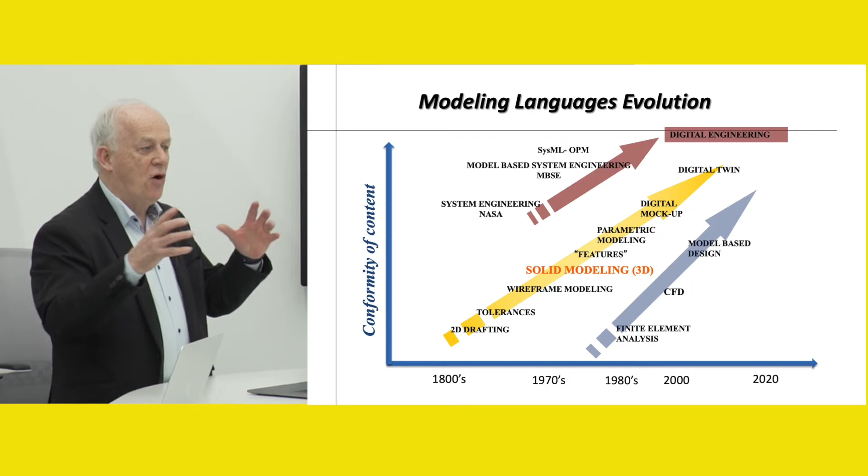And today, we're talking about digital twins, meaning can we have a digital reality that's very similar to the physical reality of an airplane, of a satellite, of a car, of many things that we have today. And this whole, all these three streams join to create now what we hope in the next coming years, what's called digital engineering.

Like I said earlier, system engineering, which is at the base of system thinking, is about dealing with complexity. What we know today in the world, and I'm sure you see it, is that complexity has increased so much that we need to find ways to treat it.

The Apollo program in the 1960s looked at this and started system engineering. Now, if you look at system thinking and digital engineering from another point of view, it has design, development, production, and service, and initially it was called computer-aided design, computer-aided engineering, and computer-aided manufacturing. But then at the system level, we moved to the virtual mock-up, the virtual prototype, and the virtual production. So it is at all levels.

And now we have at the system physical, cyber-physical system level, where we talk about digital twins, virtual reality. This is the level of digital engineering, and system thinking is all about this, looking at the overall view. There's still a lot to be developed there.

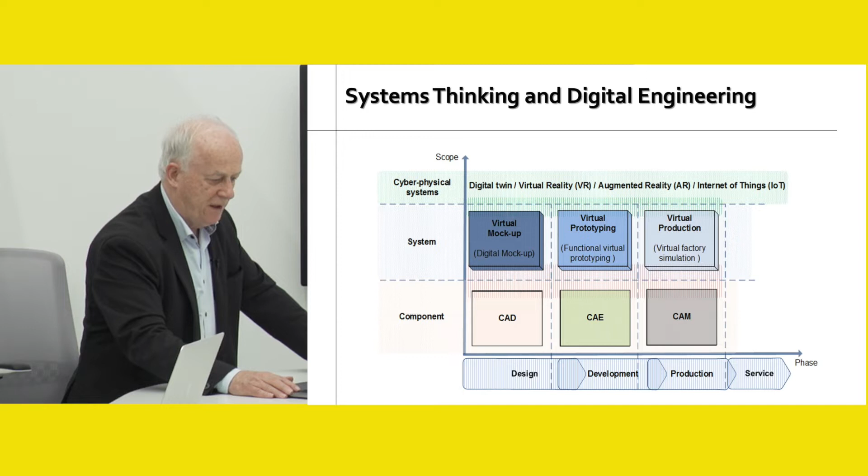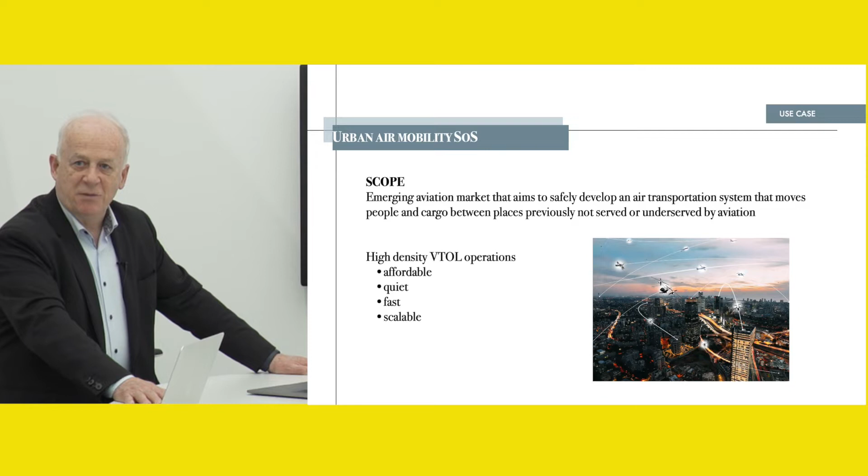I will now give the floor to Carolina, who will talk to you about a particular case, which is called urban air mobility, system of systems. As Clément was mentioning before, our group...

Basically focuses on understanding what we can do in order to reduce the complexity and the uncertainty of several systems. What we have here on the screen is a use case that we are currently working on. It's called urban air mobility. This is considered a system of systems.

The scope of urban air mobility is to bring what we currently have in terms of aviation and develop it and improve it to develop air transportation systems that will move people and cargo between places that were previously not served or underserved by aviation.

So what is required to have urban air mobility systems? We need them to be affordable. They need to be quiet, so very low noise. They need to be fast, and one of the most important things, they need to be scalable.

I'm looking personally into understanding what is the effect of technology insertion in system of systems. What you have here in the picture is basically a representation of what NASA believes should be the next step into urban air mobility. They had a call for proposals called the NASA Grand Challenge.

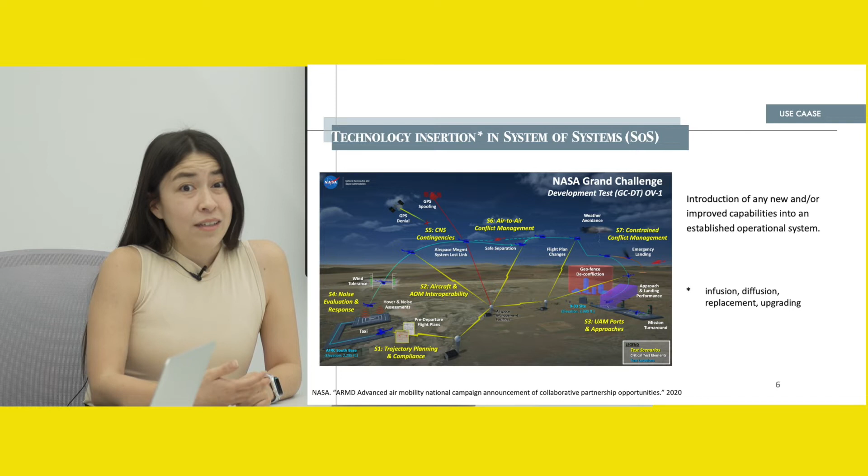Here at Skoltech, we have several courses that help students focus on these kinds of projects, and one of them is the systems engineering course. The last version of it was held last year, and the students actually focused on understanding what they can do in order to improve urban air mobility systems. So now I will give the word to Andrei, who will talk to us a bit more.

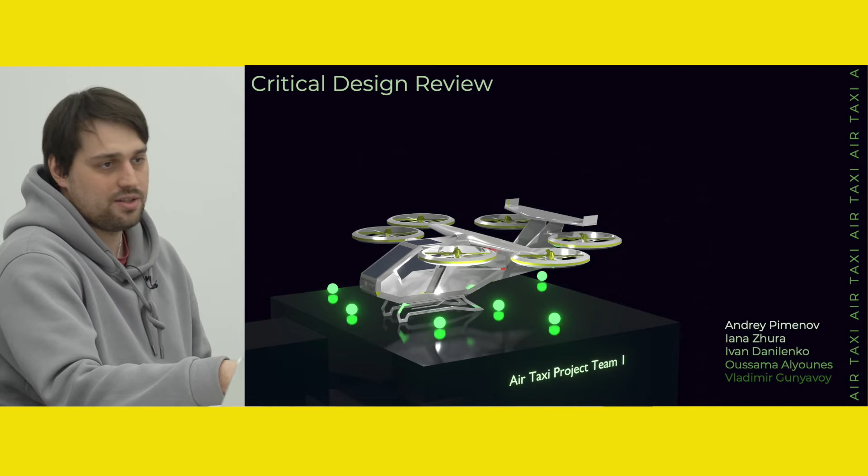Hello everyone, I'm Andrey Pimenov. I'm a fourth-year PhD student here in Skoltech, and let me show the project, which is Air Taxi, which we made in the systems engineering course in December last year. So each engineering project starts from the mission, and our project starts from the mission too.

So the mission of our project was to transport 6 passengers from Skolkovo to Vnukovo airport and vice versa with Air Taxi. We moved to developing a success criteria for this mission. System engineering starts from estimating the success criteria of the requirements of the project.

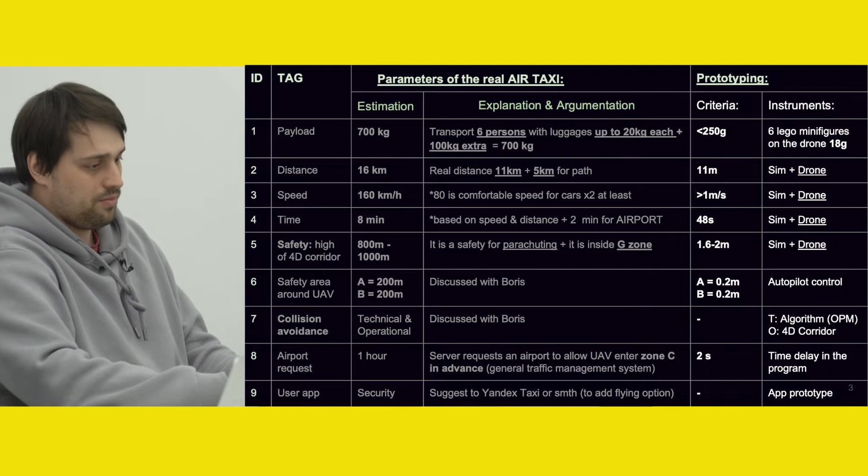On this part of the slide you can see these requirements. I'll skip a lot, but the idea is that once we formulate the requirements, we move to the architecture. This is the system architecture of the real Air Taxi. It consists of the Air Taxi itself and the system around it, for example the airport, the server, and the passengers. Passengers are also part of the system, but part of the bigger system, not the Air Taxi itself.

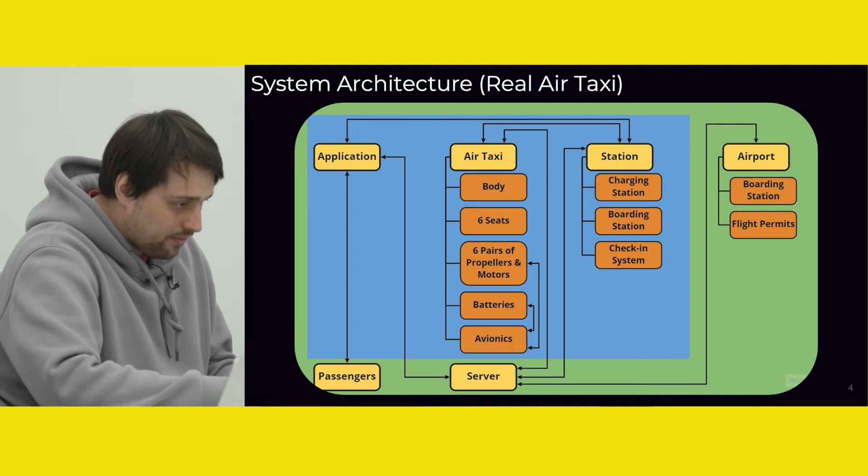Then we move to the system architecture of the prototype of the system. In our case it was very simple: it was a drone from the Geoscan company, and we programmed that drone to avoid obstacles during the flight.

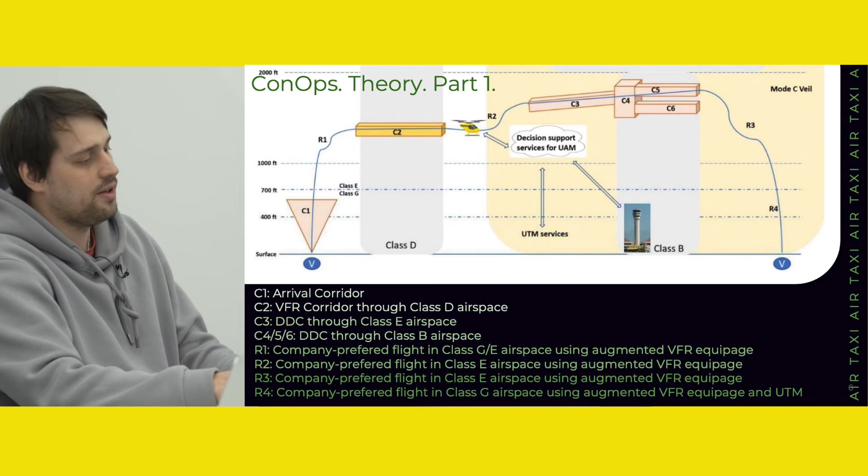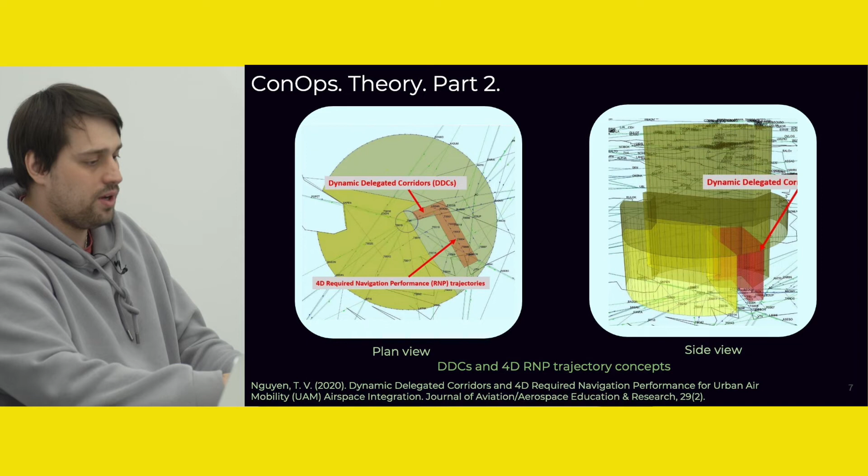This is a concept of operation from a paper we read, a very important paper, based on NASA work. This shows how 4D corridors look in a real application. Around the airport we have different zones, and just to go inside the airport - in our case this Air Taxi moving inside Vnukovo airport - we have to enter this 4D corridor.

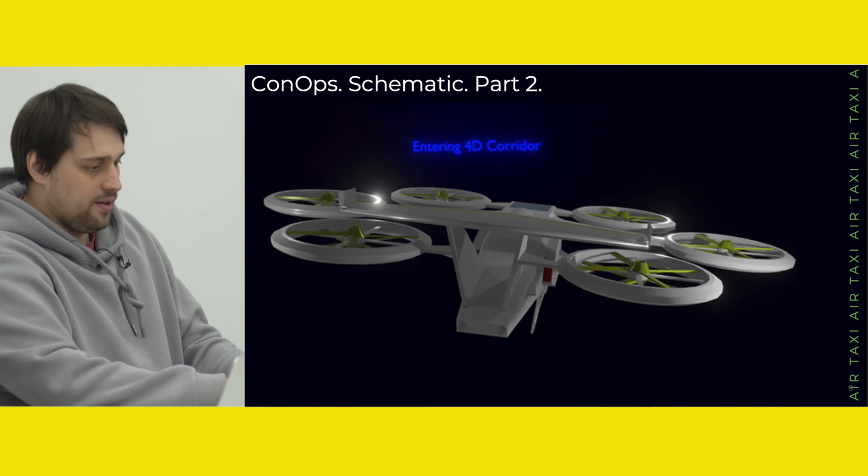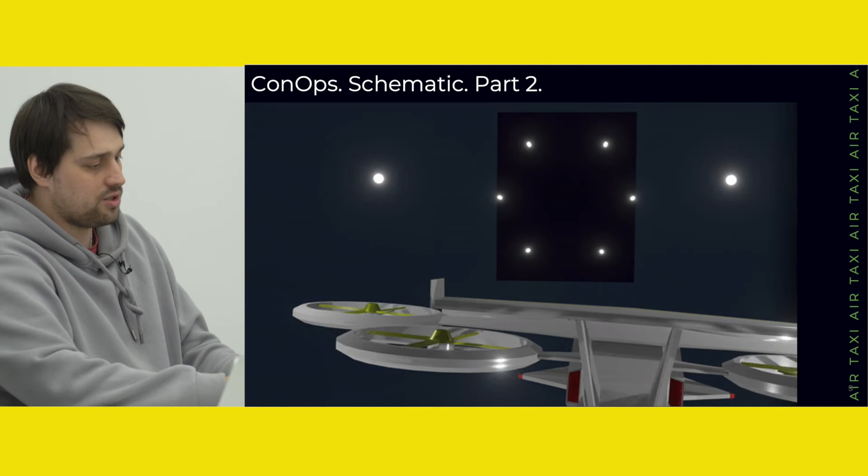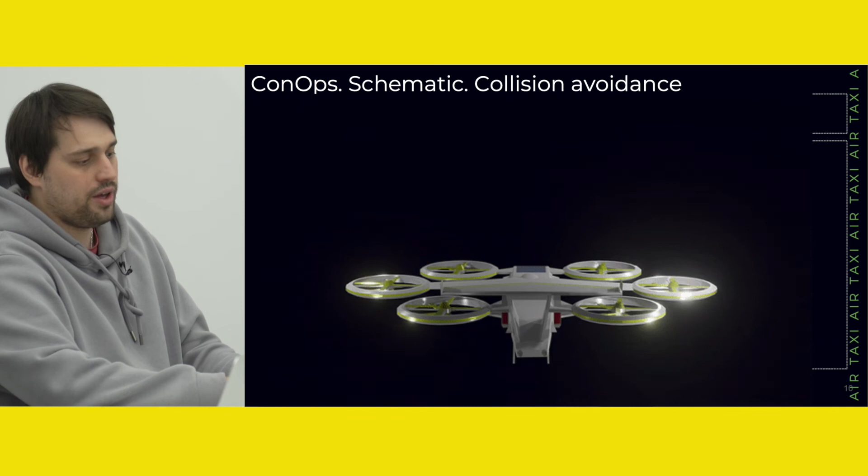On this slide you can see a visualization of this. We have the Air Taxi, and it's sending data about the 4D corridor to the airport and vice versa. On this slide you can see the avoidance - around each Air Taxi we have a special zone, a special safety zone.

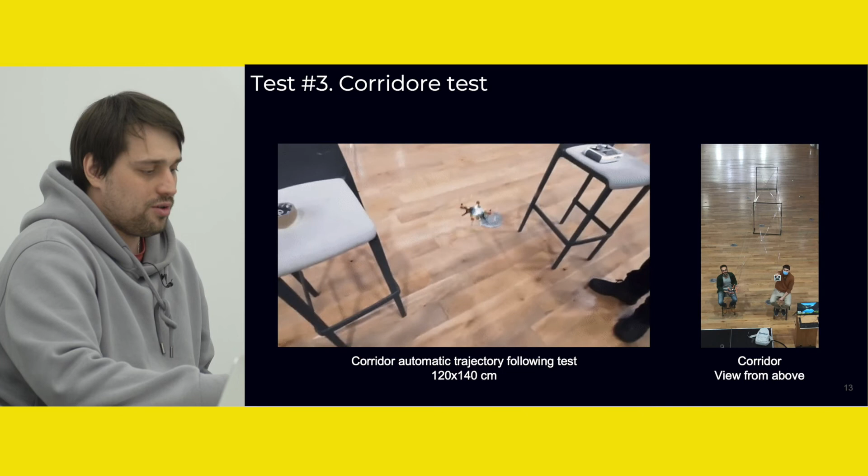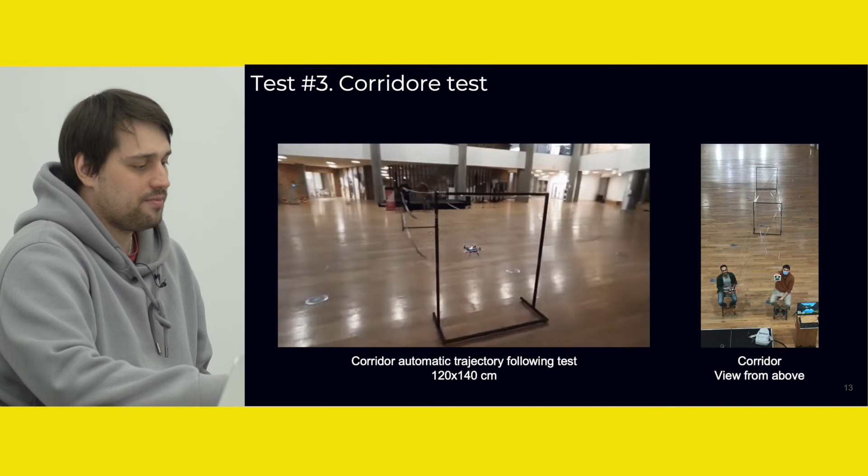Hello guys, my name is Jana Brovar. I'm also a PhD student at Digital Engineering Center and a member of the System Thinking Group. I will present another use case that we are investigating with our research group.

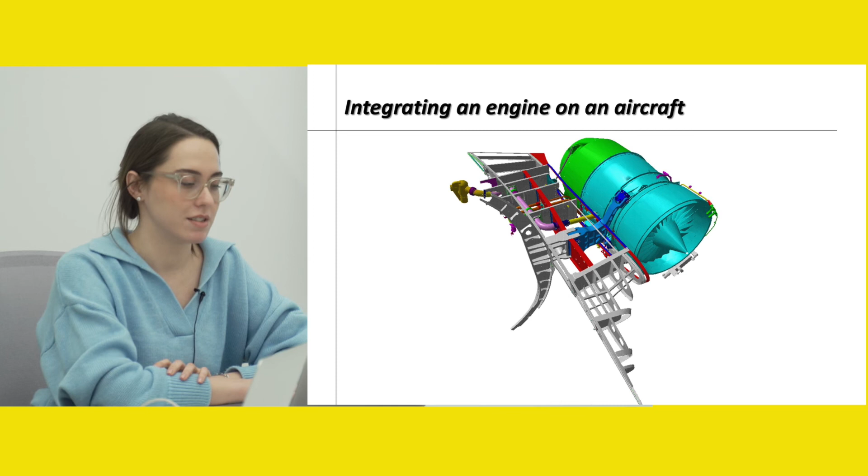It is an engine aircraft pylon. It is a critical system for the research as it supports and provides the function of the engine, supporting thrust, providing electric power, connecting the engine to the airframe, and supporting cooling and heating of the passenger compartment. Thus we should pay attention to that system as a critical point in aircraft design.

One of the tools that could be used for system components analysis is the design structure matrix, presented here. The design structure matrix is a tool that supports network modeling, providing the analysis of system components and their relationships.

DSM could help us not only analyze the system architecture, but also provide analysis of system behavior, as we can analyze the interaction between each of the components. By interaction I mean the different flows, for example flow of material or some fluids, flow of electricity, and this interaction is exactly what brings the system its value. That's why this tool helps us have a deep analysis of the pylon architecture.

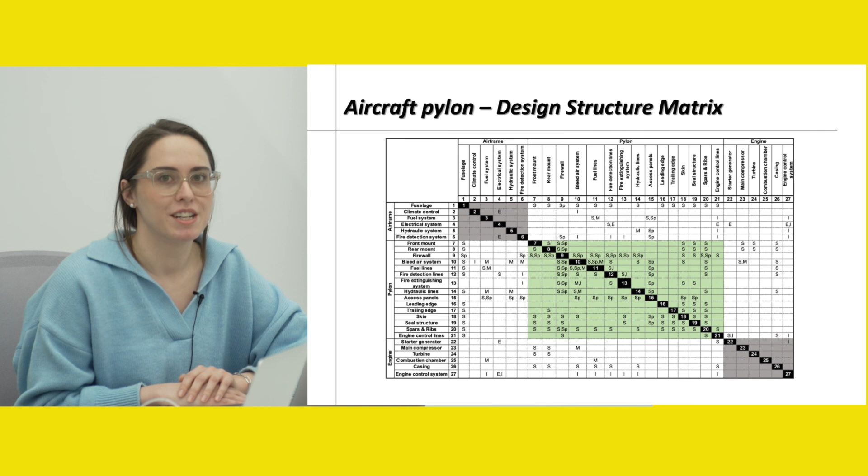Here in the green zone we can see the internal interfaces of the pylon, and the gray zone represents the external interfaces with the airframe and engine. For our research purposes we use different tools in our research group, and this is only one example, but there are many more, and we are also looking for the integration of all these tools to have a more productive product development process. Thank you for your attention.